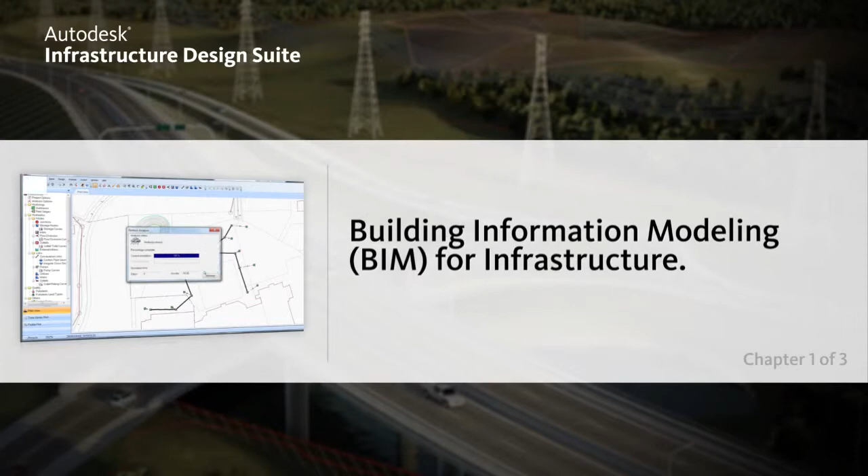In the following chapters, you will see examples of how you can plan, design, build, and manage, all with building information modeling for infrastructure. You can realize the benefits of BIM for infrastructure. Whether you are working on transportation, land, water, or energy projects, BIM is an intelligent model-based process that can provide insight, helping you take your projects from concept to completion faster, more economically, and with less environmental impact.

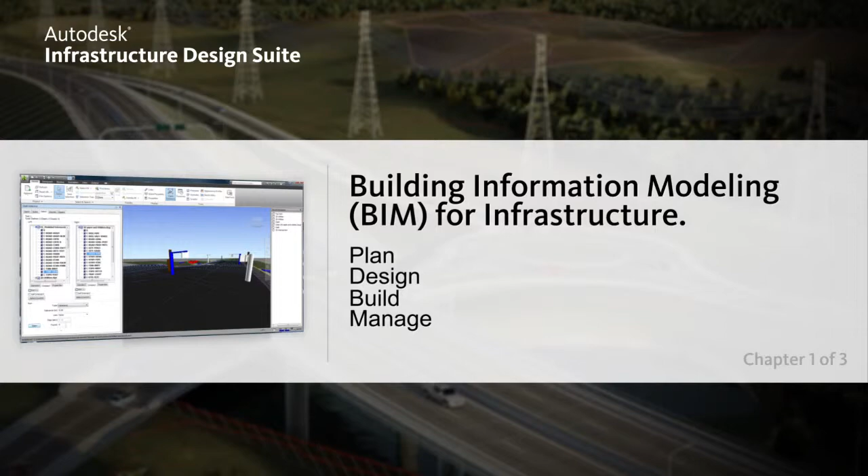The Standard Edition, ideally suited for GIS and planning professionals, extends the power and flexibility of familiar AutoCAD workflow with planning, foundational design, and coordination capabilities. The Standard Edition includes AutoCAD, AutoCAD Map 3D, and Autodesk Navisworks Simulate.

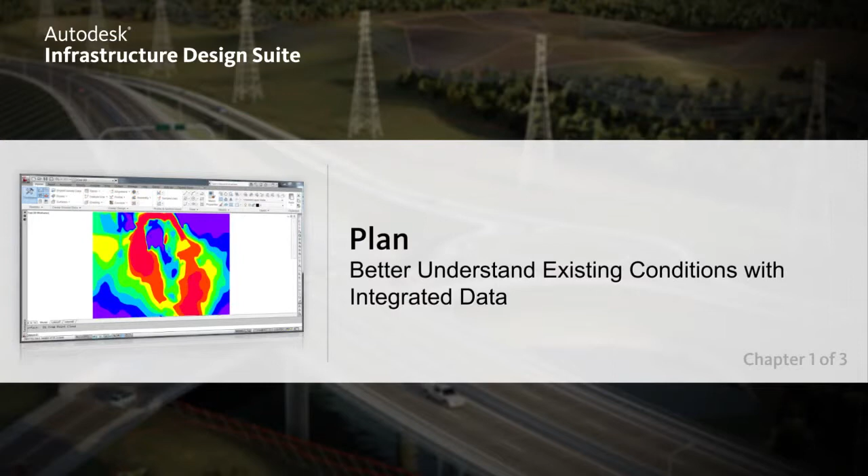With the Standard Edition, you can plan your projects with greater confidence and help inform critical design decisions earlier in the process. Broad access to CAD and GIS data helps you develop a better understanding of existing conditions. And geospatial analysis capabilities can help you gain insight into project feasibility and impact.

Integrate models from the extended team to improve coordination and review. And manage your infrastructure information more dependably with intelligent industry models that help you maintain data quality standards and better support future decision-making for operations, maintenance, and capital planning.

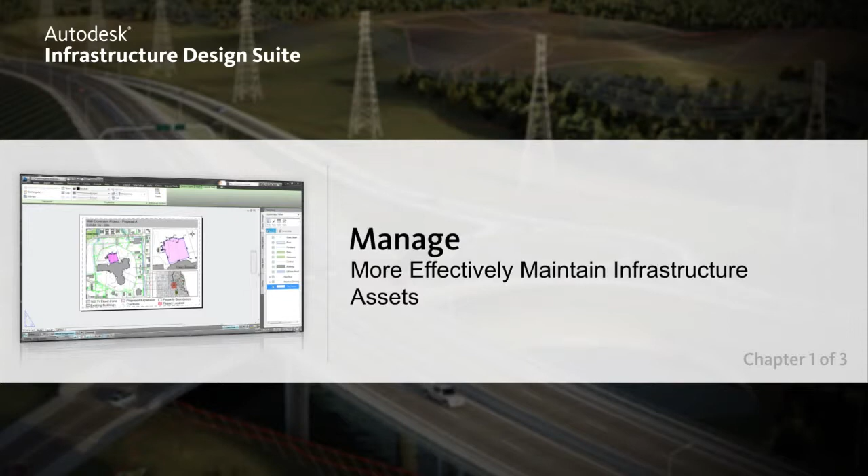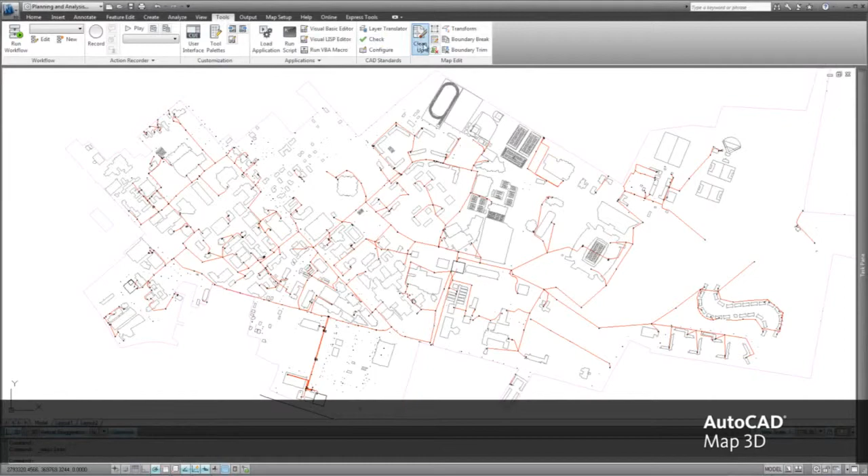Starting with a campus layout drawing done in AutoCAD, you can set up layer states to highlight the high voltage primary lines feeding the campus. This drawing can be inserted into an AutoCAD Map 3D industry model template and moved to the correct geographic location to tie into the other facilities and geographic information.

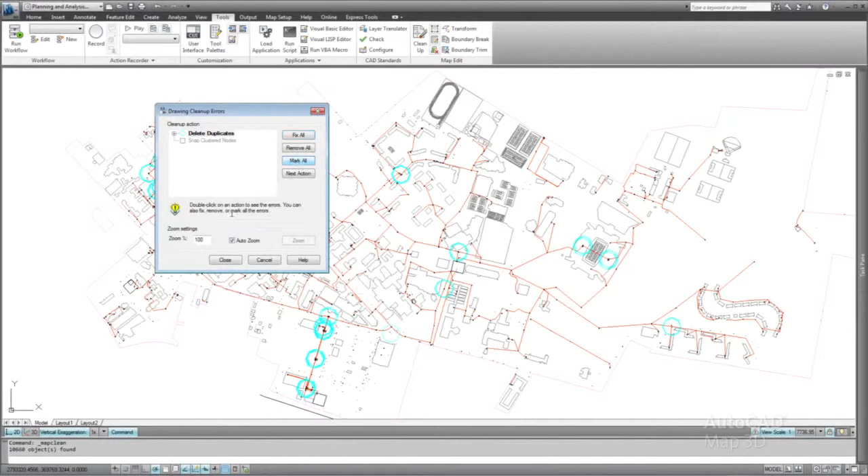Potential drafting errors such as duplicate entities or conductors that might not be snapped to the transformers can be corrected automatically using AutoCAD Map 3D geometry cleanup tools. This is important to ensure accuracy of the number of features and entities that are recorded in the drawing.

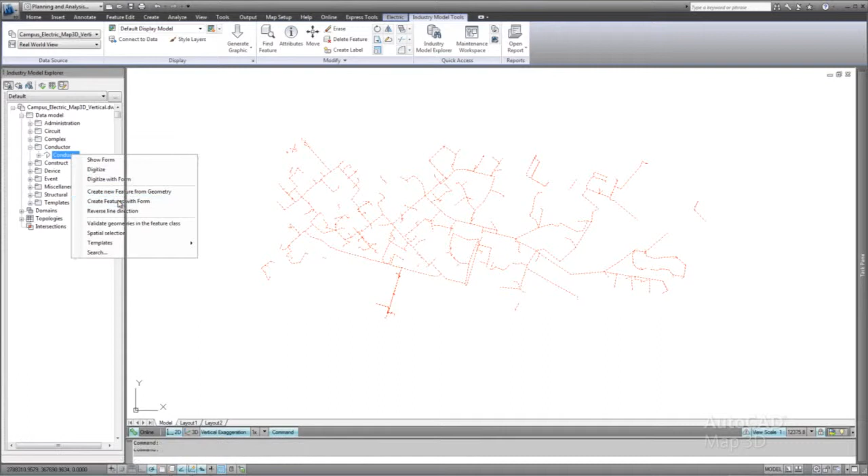Once your drawing is cleaned up, it is ready for conversion to the vertical industry models that adds intelligence that aids planning and management, in this case for your electrical network. Using AutoCAD Map 3D geometry conversion tools, existing CAD entities can be converted into real-world representations of electric facilities.

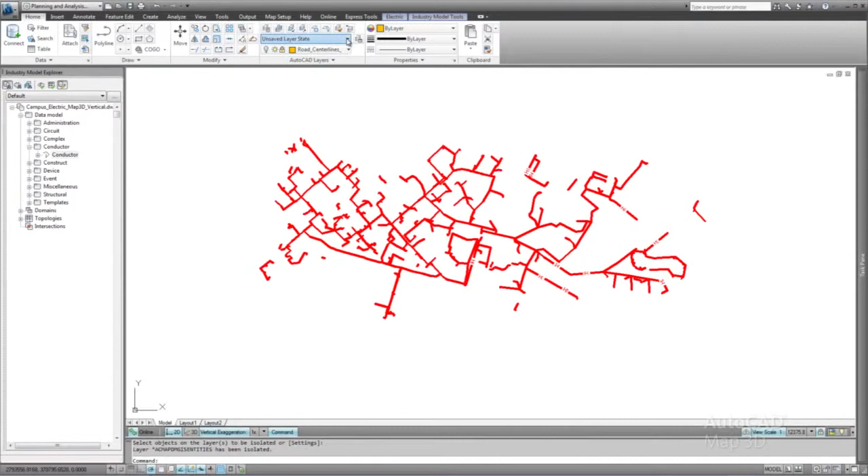Using the customizable forms interface, additional information such as the type of conductor, in this case primary 12 kV wires, can be assigned to the conductors. Additional drawing geometry such as junctions and transformers can be similarly converted into intelligent junction and transformer objects.

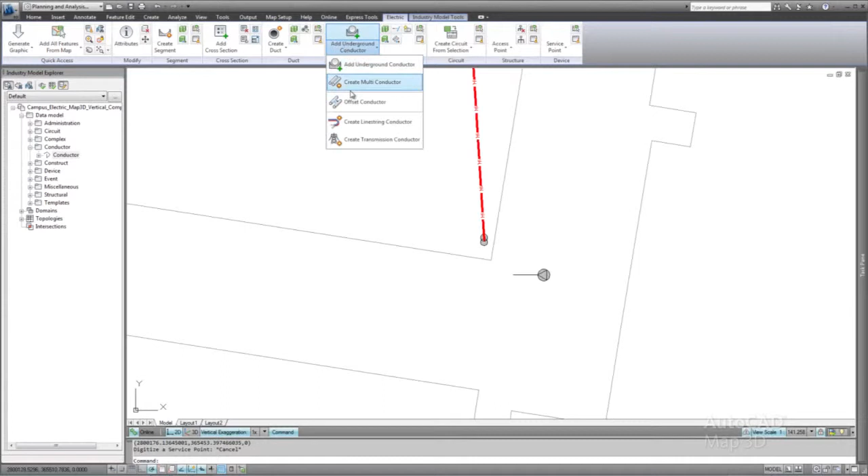Extending the network is easy with AutoCAD Map 3D industry-specific business rules and data creation functionality. For example, pull a service connection from the existing transformer, which will automatically propagate the voltage settings assigned to the step-down transformer and assign connectivity information.

Having this intelligence is useful for your planned and ad hoc maintenance activities, such as a particular section of the network that needs to be de-energized for rehabilitation work. You can use the analysis capabilities in AutoCAD Map 3D to easily identify feeders, such as the nearest switch that can be turned off to allow planned upgrades at the service area.

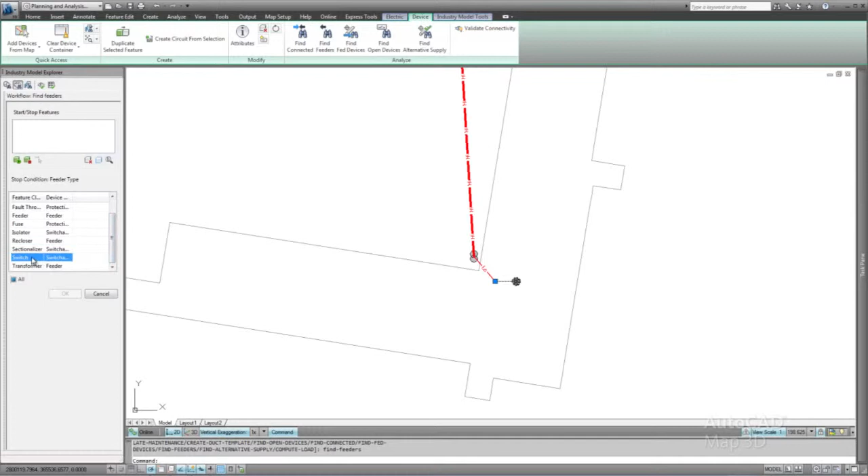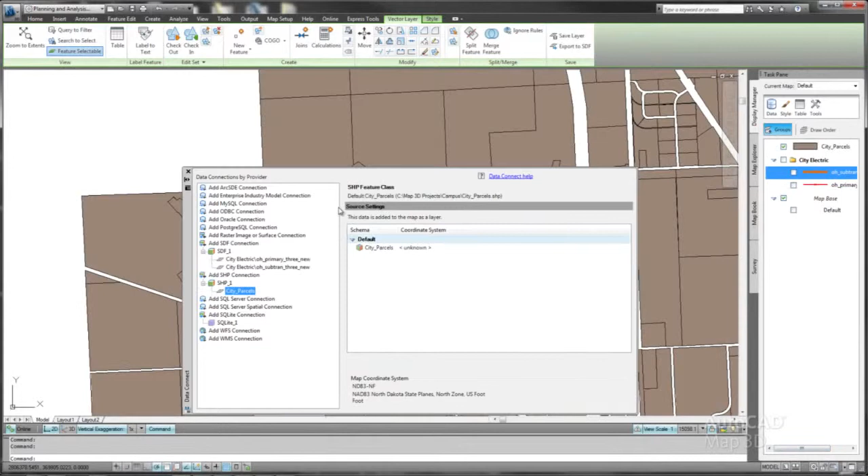Since AutoCAD Map 3D enables the positioning of existing AutoCAD data into its correct geographic location and provides native access to existing conditions in GIS formats, you can automatically tie in data to a larger geographical context. For instance, bring in existing city layout and electric transmission lines for large-scale planning and analysis of macro-level impact.

In conclusion, what you saw is a process where the Infrastructure Design Suite Standard Edition provides AutoCAD for basic drafting, documentation, and layout work, and AutoCAD Map 3D to add intelligence for industry-specific data that helps make more informed decisions for the planning of new and maintenance of existing as-built infrastructure.

Infrastructure projects can be incredibly complex with many different disciplines working together. Adding to the complexity is the fact that projects usually have some sort of impact on the existing infrastructure, including water, sewer, and electric utilities.

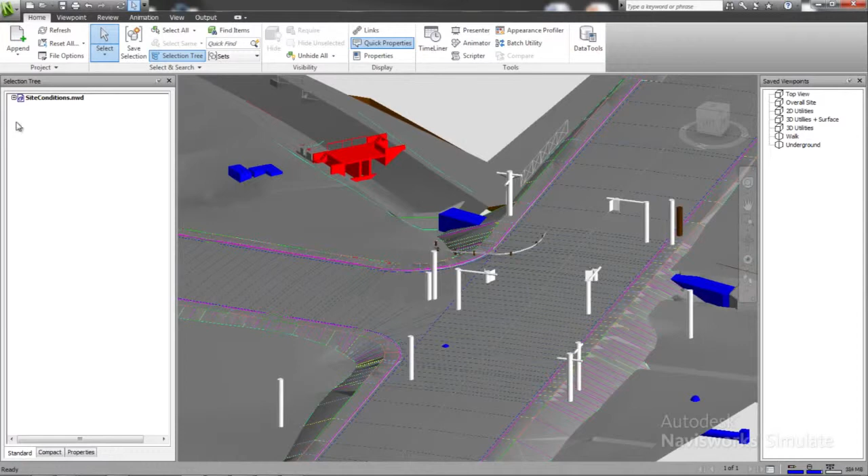Being able to see a complete view of the existing conditions, both above and below ground, will help infrastructure planning professionals make sense of the complexity so they can make smarter, more informed decisions about the project. Autodesk Navisworks Simulate plays a key role in doing this.

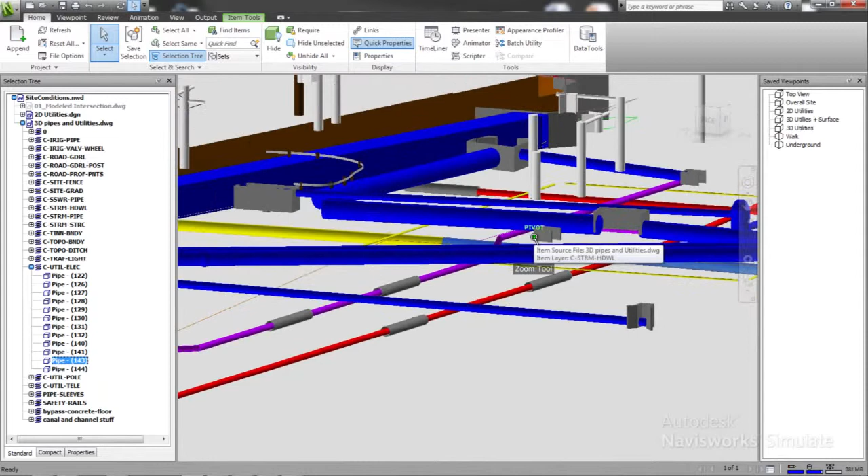In this example, a highway intersection needs to be reconfigured to accommodate additional turning lanes. The challenge is that there are a series of canals that pass through the intersection that need to remain functioning during construction. Using Autodesk Navisworks Simulate, you can quickly get an understanding of the existing conditions at the site, both above ground and below ground, to help address that challenge.

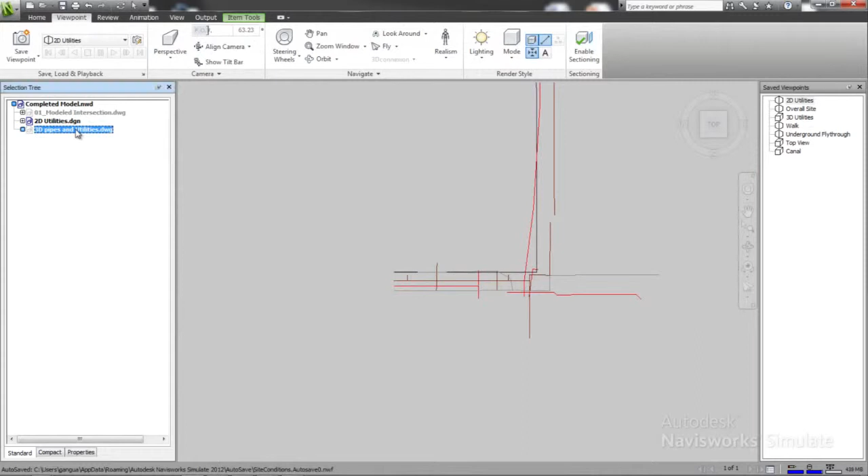You can bring in existing 2D utility network data, in this example available as MicroStation DGN files, ground surface and corridor models files from the original road intersection constructed at the site, and 3D utility captured using ground-penetrating radar equipment combined with building structures from existing 3D AutoCAD drawings of the canal facilities.

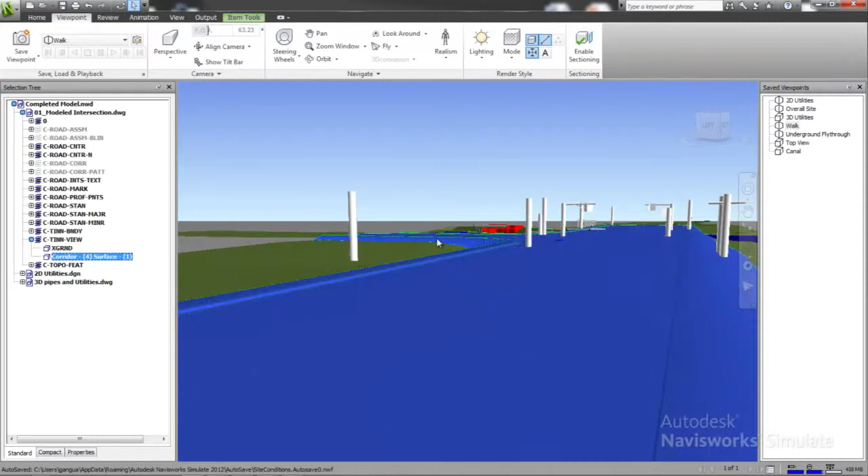By setting the transparency of the existing surface geometry you can virtually walk the site and see the underground utilities. In addition to walking above ground, you can also fly through the underground view of the site, reviewing the existing conditions as well as examine individual elements of the 3D model.

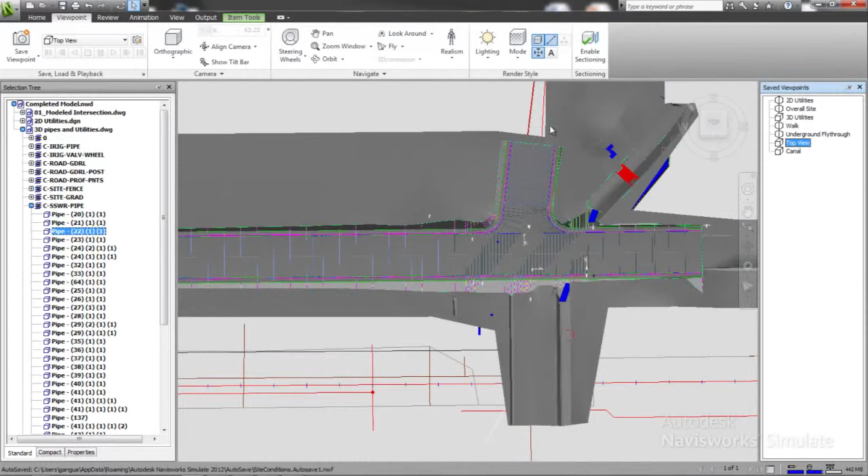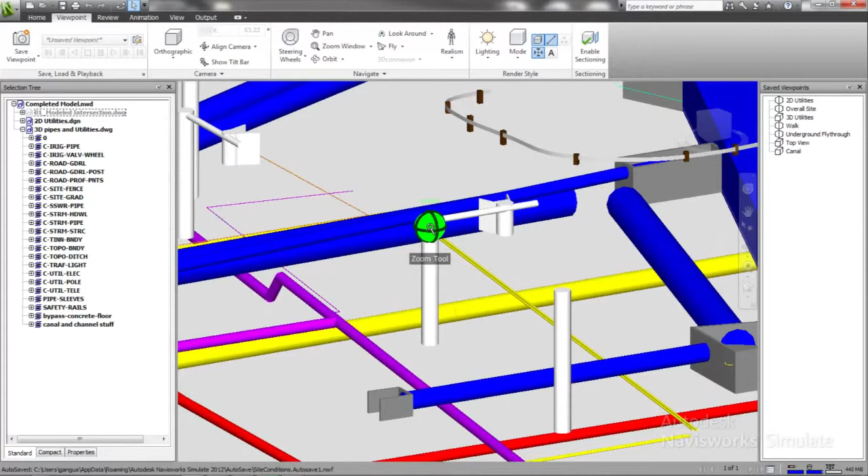Being able to actually see and experience the project site in 3D allows review and coordination between project teams early on in the project planning phase, allowing members to identify and address potential areas of concern. Autodesk Navisworks Simulate has the ability to use a combination of 2D and 3D information from multiple disciplines and in a variety of formats, and make the process of getting that existing conditions view of the project site easier.

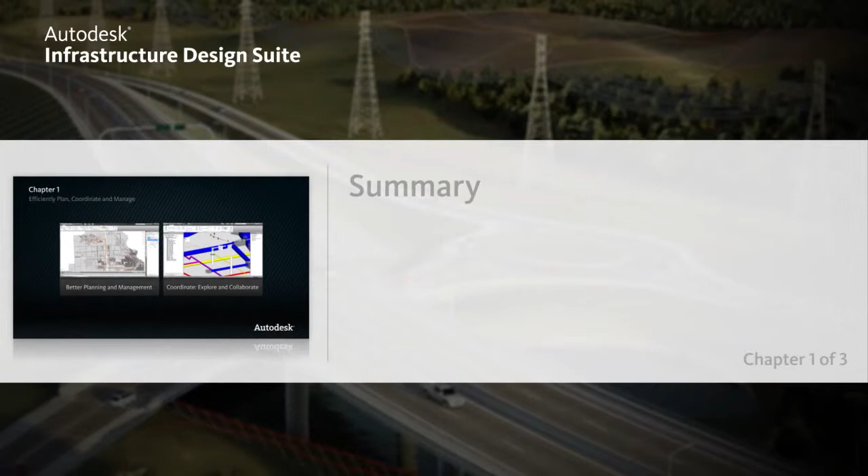The Standard Edition, ideally suited for GIS and planning professionals, extends the power and flexibility of familiar AutoCAD workflows with planning, foundational design, and coordination capabilities.